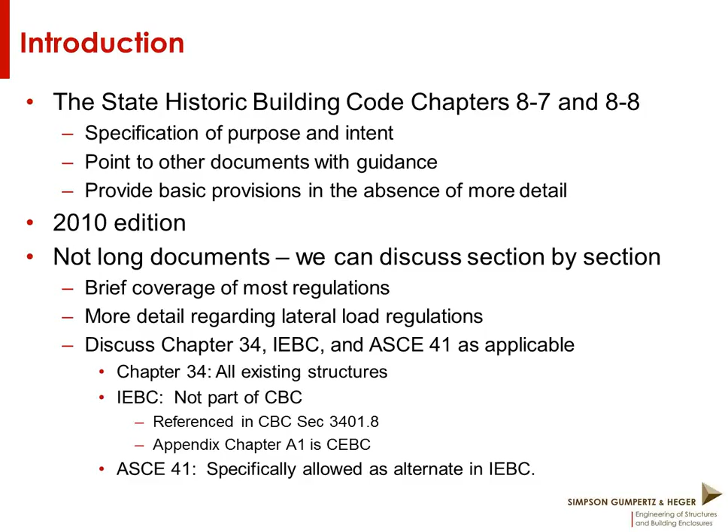So here's an outline of what we're going to be discussing following the introduction here. We'll go through Chapter 8-7, which is the structural regulations. Again, talking about the purpose and the intent, talking about structural survey, which is essentially an existing condition survey. Talk a little bit about non-historical additions and alterations, structural regulations, which are essentially everything but seismic, and the lateral load, which is really just the seismic part.

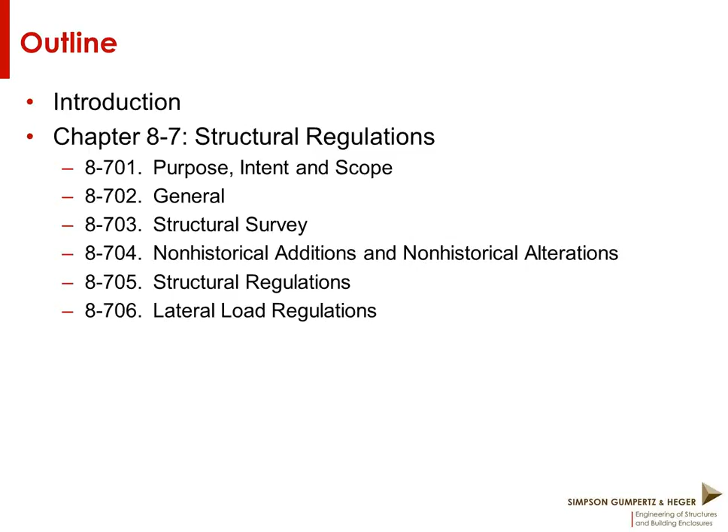Following that, we'll talk about Chapter 8-8, which is the archaic materials portion. Again, this discusses what its purpose and scope is. It talks about what types of materials are around in archaic structures, what those materials might be. Specific conditions are provided for individual materials: masonry, wood, adobe, concrete, etc. We'll talk about those each in turn. I'll also talk about the table at the end of that chapter, which gives strength values for existing materials, and then finish with a brief summary.

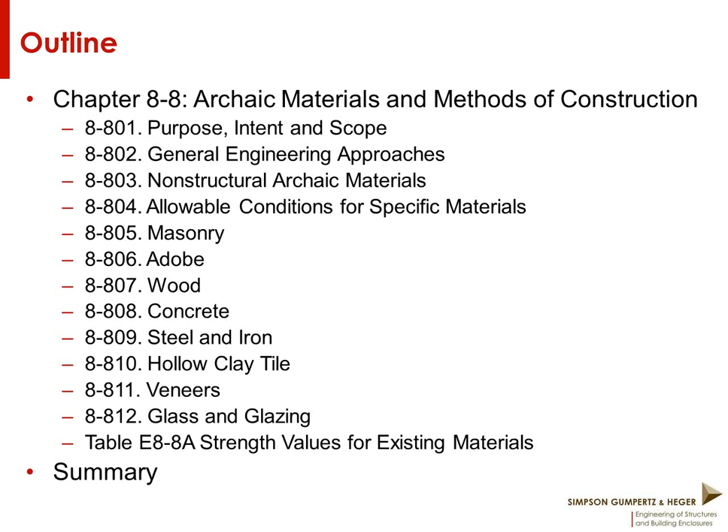Structural regulations. The purpose of these structural regulations is to provide an alternative to be used for historic buildings. The code references specifically qualified historic buildings and indicates that you can't just use this if you think it's appropriate. You need to get approval from the enforcing agency.

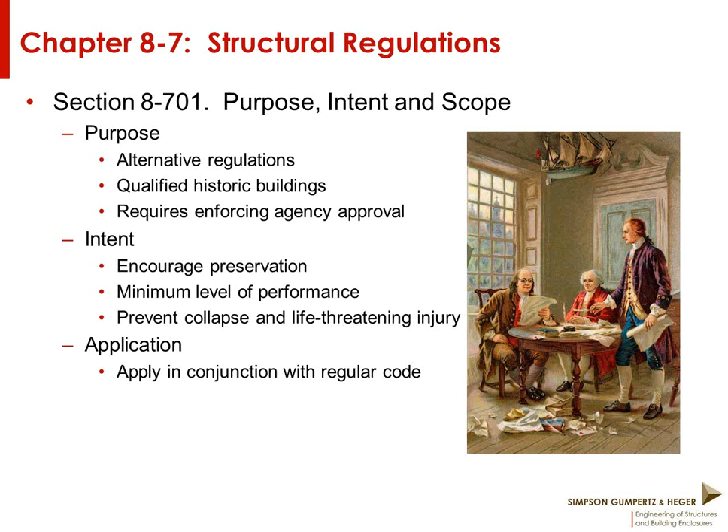The idea behind everything, of course, is to encourage preservation, to provide a minimum level of performance that's appropriate, and to prevent collapse and life-threatening injury. That's the same performance goal that exists in the main building code for regular structures. The idea, because this code is only a few pages long, is to be applied in conjunction with the regular code as well as in conjunction with other documents.

In general, the idea here is that we want to provide a level of safety, and that level of safety for critical facilities should not be reduced. In other words, if you have something like a hospital or a police station that's also a historic structure, you're really not intended to be using reduced values for those elements. You really should be using the provisions of the regular building code.

That said, it also specifically says that you can do a voluntary upgrade, particularly for seismic purposes, without any regard to specific provisions.

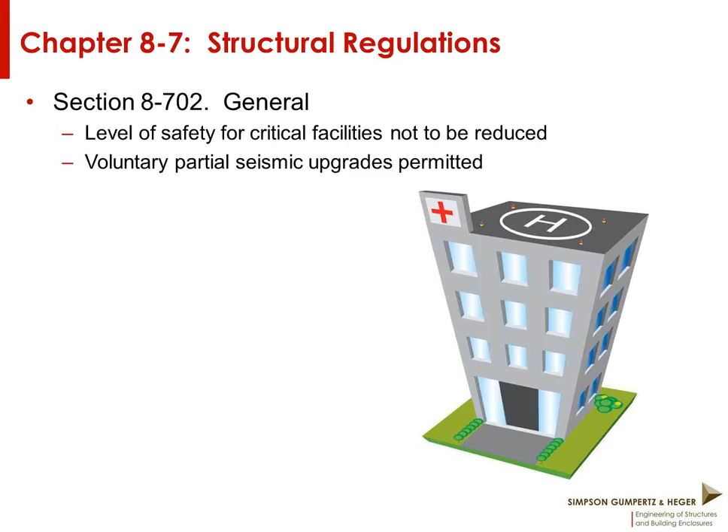Structural survey is what they call essentially both reviewing drawings and also reviewing the conditions in the field. With any existing building, and particularly with a historic building, the survey is critically important in order to understand what you actually have. You may have a great set of documents, and you may have had some changes that have occurred to the building over time, or the documents themselves may not be very good, and you may have to spend quite a bit of time in the field to document yourself what's actually there.

There's a particular requirement with regard to anchorage of veneers. The CHBC in the structural sections really spends quite a bit of time on veneers relative to other things because they are so critical in terms of safety, not only for occupants, but for those outside the building. If you're going to be adding or altering non-historical portions of the building that are structurally separate, then you would just be using the regular building code there.

The existing structure is not permitted to support additions unless the existing structure is strengthened. This is actually a little bit more restrictive than Chapter 34 and the IEBC, which both give a little bit of leeway, 5% additional for gravity and 10% for lateral load. But since the State Historic Building Code is an alternate provision, you're always permitted to use those normal code provisions, which would allow you those small increases even for historic buildings.

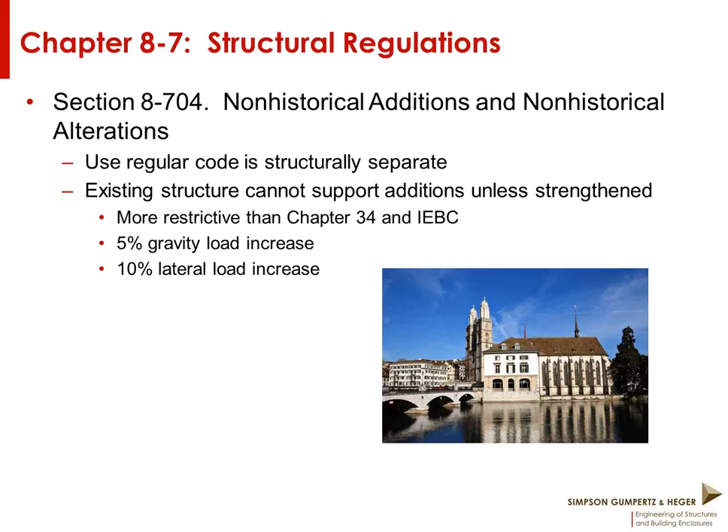The structural regulations here are essentially everything but lateral load. Everything but seismic. There is a specific provision that says with regard to gravity loads, you're allowed to consider that the structure is acceptable if you don't see any distress and you do see a complete load path. That is, the fact that the building has been around for a number of years and has been successfully resisting gravity loads for all that time. If there's no change in the loads, then it's permitted to consider that that's acceptable.

You do have to evaluate for wind and seismic, as indicated in the subsequent sections. Wind loads are allowed to be reduced. You only have to use 3/4 of that specified in the regular code. But you do have to correct something if you see that it's unsafe.

There's an interesting provision here that says if you are able to improve the performance, that is to reduce damage, particularly with regard to wind and seismic loads, without impacting the historic fabric, then you're recommended to do that. Of course, it's not much of a code provision, but it is a suggestion that wherever possible, you should improve the performance because that will aid in the preservation of the structure.

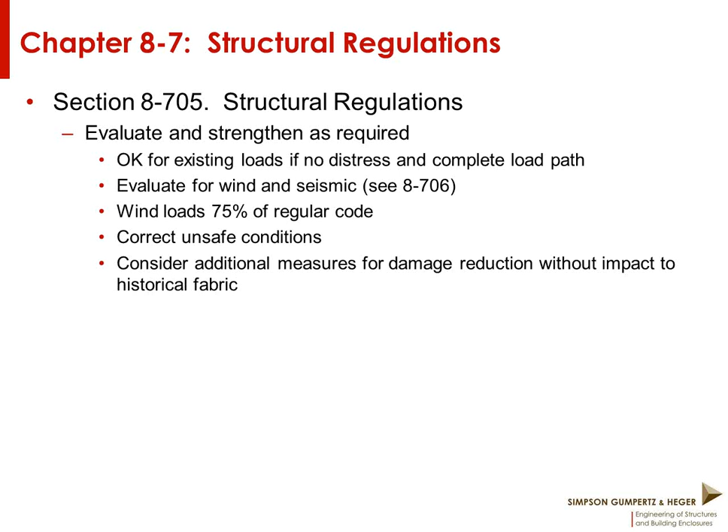The lateral load regulations are essentially the seismic regulations. We'll spend quite a bit of time on this relative to some of the other provisions. First of all, the CHBC says you're allowed to use the R factors, that is the response modification factors that are applicable in the regular code. The thing is that they're not usually applicable because they all come with special detailing requirements attached, and it's very rare that in a historic structure you're actually going to see things that comply with those detailing requirements.

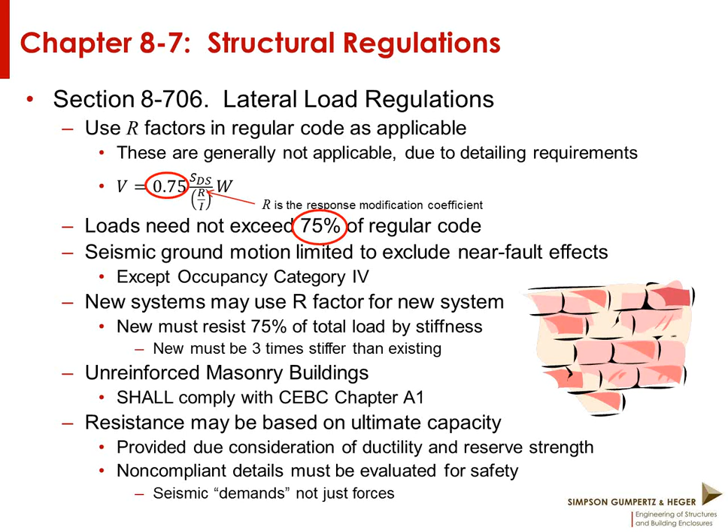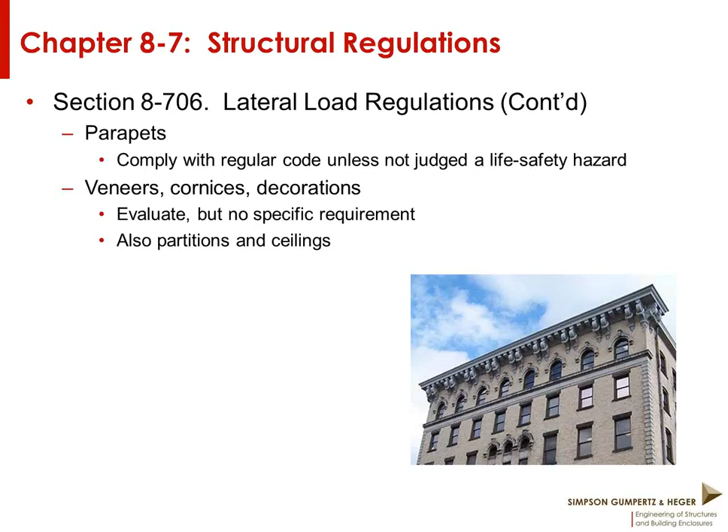Parapets are addressed specifically because they are potentially quite a hazard for passersby, and you jump out of the CHBC and just comply with the regular code with regard to parapets. Veneers you're required to evaluate, but there is not a specific requirement except what exists in the regular code. Similarly for partitions and for ceilings. Alternative provisions for lateral loading exist in Chapter 34, where there are requirements for modifications which are permitted within listed thresholds.

IEBC, as I've discussed before, is a great resource. Depending on the level of work, there may be a full or partial upgrade necessary using the IEBC. The full upgrade that they discuss is essentially equivalent to the regular code. The partial upgrade is 3/4 of the design forces. This is the same as the CHBC, so it really is pointing you in the same direction.

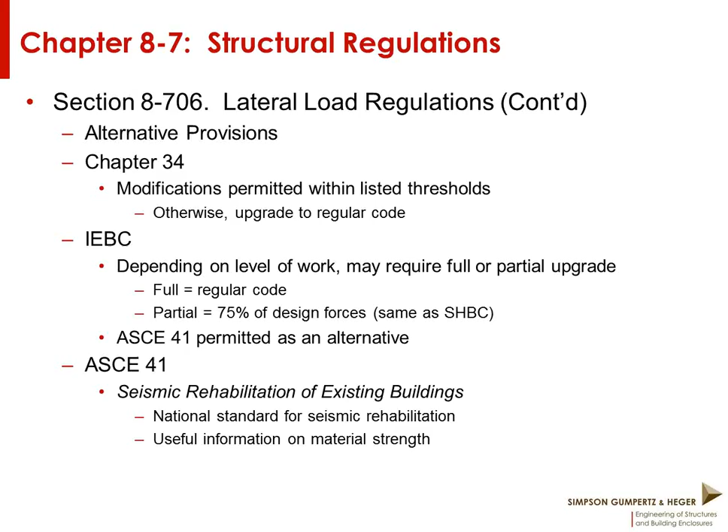ASCE 41, this national standard document, is permitted explicitly as an alternative way of complying with the IEBC. This document, called Seismic Rehabilitation of Existing Buildings, is a national standard. It's been around for quite a few years now, and a new version in 2013 is just about to come out. It has a lot of great material on strengths, far in excess of what you're going to find in the chapter 8-8 that we'll talk about in a little bit.

It's really the best and most appropriate approach for seismic analysis and upgrade of any existing building, particularly a historic building. The reason is because this is a displacement-based approach rather than a force-based approach, and it encourages nonlinear analysis. This, of course, is going to take more effort in the analysis and often requires a peer review, but it really allows the specific consideration of actually how these archaic materials behave, and provides a lot of guidelines as to the appropriate levels of deformation that are acceptable.

These guidelines are based on state-of-the-art research, which is continuing, and we do have a lot of great information about archaic materials, as well as not quite so archaic but still older materials. This allows the best consideration of the capabilities of the existing building. As a result, it's more historically sensitive and results in lower construction costs, if higher engineering costs.

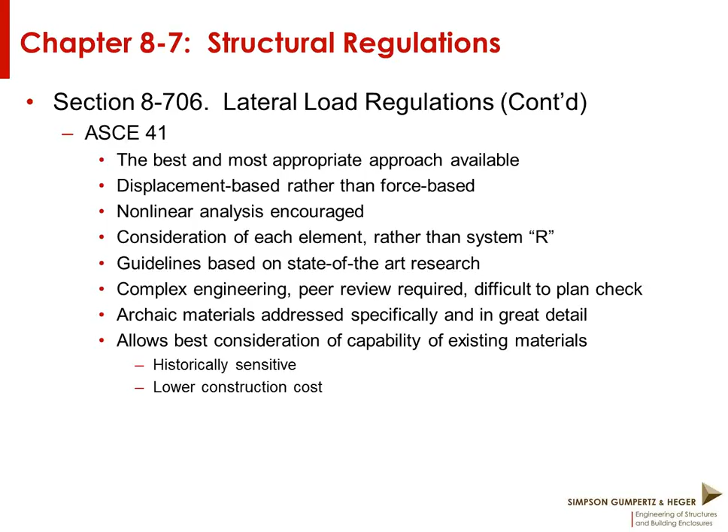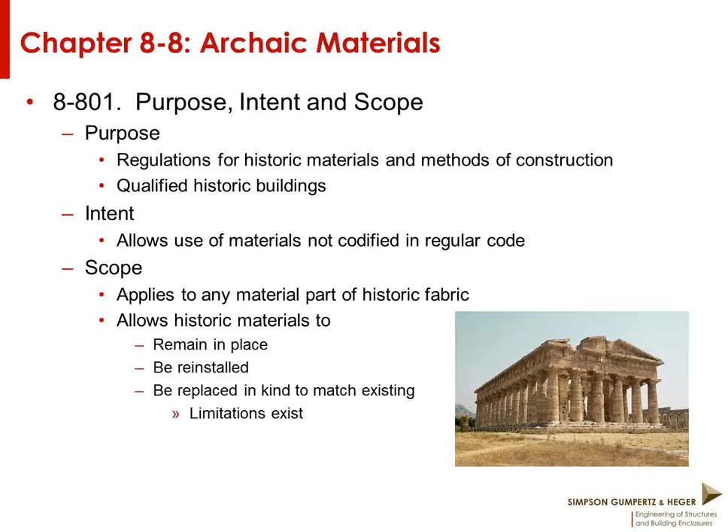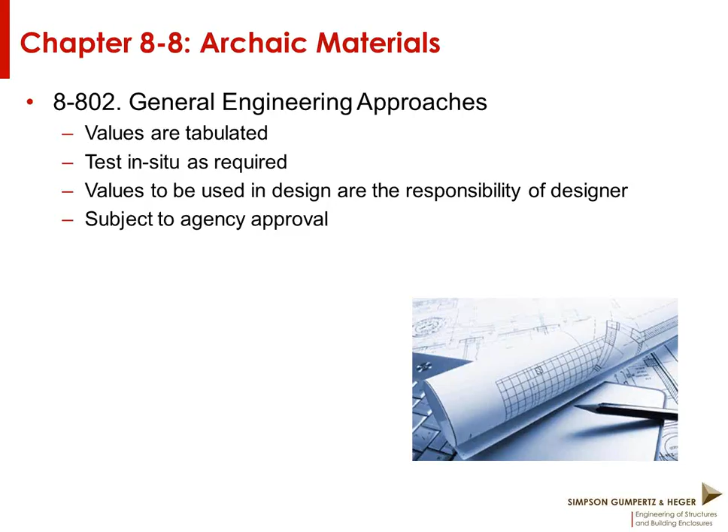The general approach is that they have tabulated values, but it is recommended to test materials wherever possible. The bottom line here is that there are values in the table. They recommend that you do testing, but the values that you actually use in the design are really the responsibility of the designer and subject to approval by the enforcing agency.

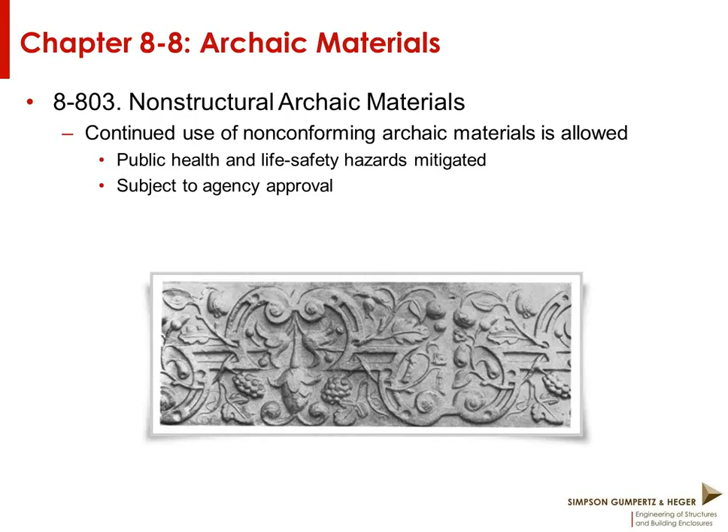You're allowed to continue to use non-conforming archaic materials, provided that there is no public health or life safety hazard, and of course where the agency approves.

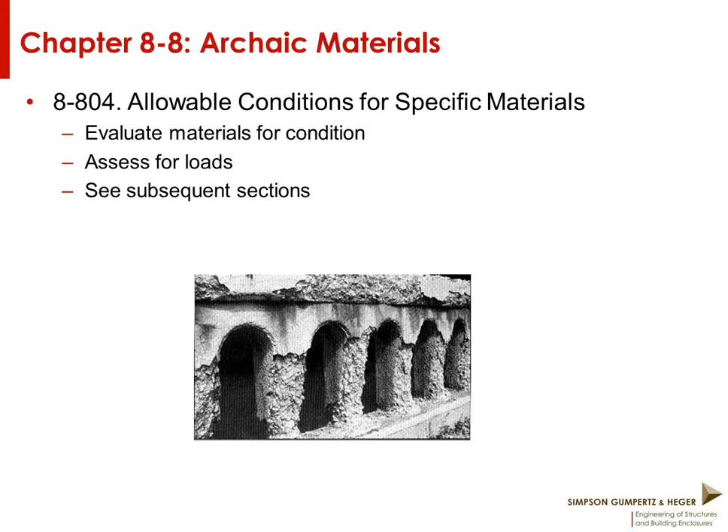In masonry, which applies to both reinforced and unreinforced masonry, you're permitted specifically to use a shear value of 9 pounds per square inch without doing any testing. This is a value that's a fair amount lower than in the CHBC Appendix Chapter A1. But it is recommended that you do testing nonetheless.

It specifically indicates that if you have stone with brick backing, you can treat it as solid brick within certain limitations. The code also allows you to repair or infill existing walls as they are currently built, but where walls are completely reconstructed, they must conform to the current code. This harkens back to the requirement previously that you are allowed to use archaic materials, but it does say here that if you are reconstructing a wall completely, then it must conform to the regular code.

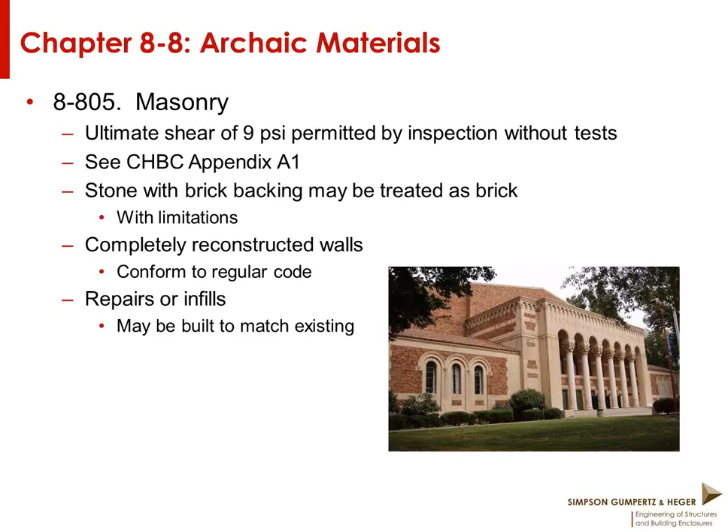Adobe is addressed in this chapter and really not anywhere else. That is unburned clay masonry. Although there's not a whole lot of information about adobe, this is really the best information about adobe that exists anywhere. They make specific point about deterioration. Clearly, in adobe, both the material itself as well as the mortar are quite susceptible to deterioration due to water infiltration in particular.

There are height to thickness ratios for walls that are specified. For single story or bottom story walls, a ratio of 6, and for upper stories, a ratio of 5. These are some pretty stout walls, but that is typically what you see in adobe structures.

There are specific requirements then for bond beams at floor and roof levels, that is reinforced masonry elements at the floor and roof levels. Interestingly, they indicate an ultimate shear of 12 psi permitted in adobe, which is actually larger than the value that they permit for regular unreinforced masonry. Not quite sure why that's the case.

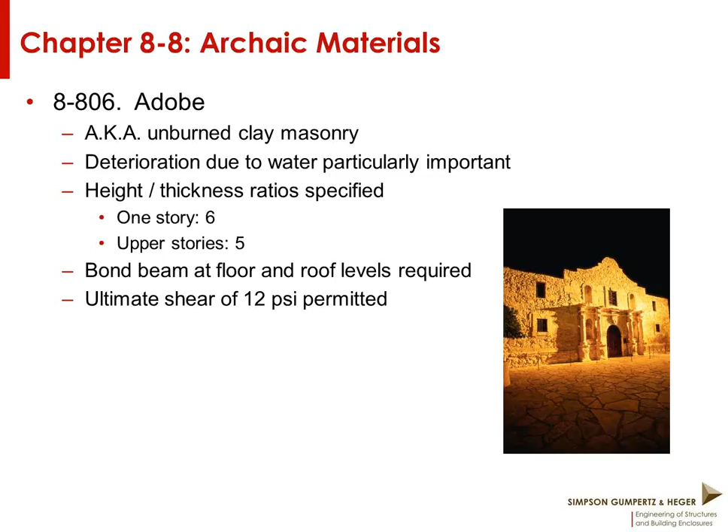There are quite a bit of strength values provided in the tables for wood. They do recommend that you investigate fastener details and spacing before using those tables. There are allowable stresses, and you're permitted to use the values consistent with the codes applicable at the time of construction. This is important because the wood was better when many of these older buildings were built.

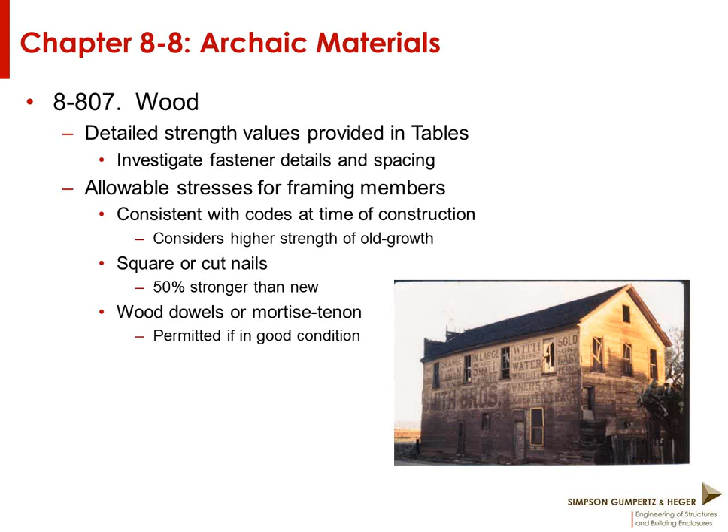The older codes actually allow you to use higher stresses than exist for current wood. Square nails or cut nails are stronger than new nails, and you're allowed to use more load in them. Wood dowels and mortise and tenon, which are almost never used anymore but do exist in some historic buildings, are permitted to be used provided that they remain in good condition.

Existing concrete may remain in place regardless of reinforcing or detailing. It's certainly reasonable — if you're going to permit unreinforced masonry, you ought to be able to have unreinforced concrete; it's certainly better. That said, details must be evaluated for strength and behavior.

Even if you're using the State Historic Building Code and not using ASCE 41, ASCE 41 Chapter 6 is still a great resource for strength data. Concrete strength is listed by time, that is time built, and also where it exists in the building — for example, time frame 1900 to 1919, 1920 to 49, etc., for all these various things: footings, beams, slabs. This is so much more detail than you'll see anywhere else, and ASCE 41 Chapter 6 has this.

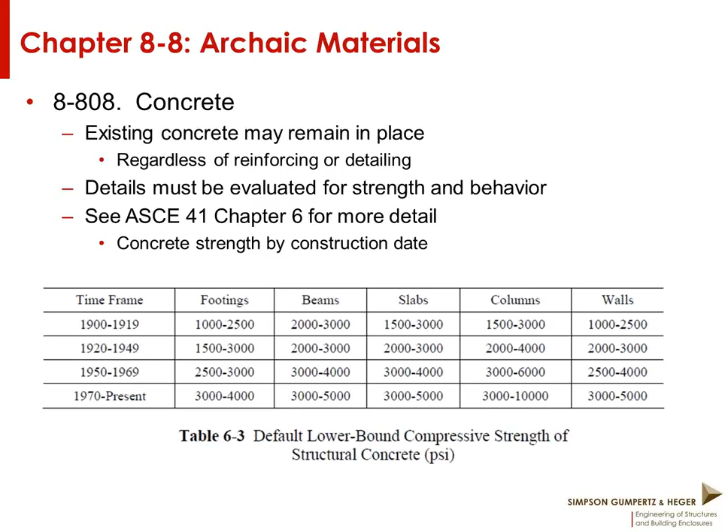There's also information in ASCE 41 Chapter 6 discussing reinforcing steel — again, quite a bit of detail based on year constructed and what grades were available at that time.

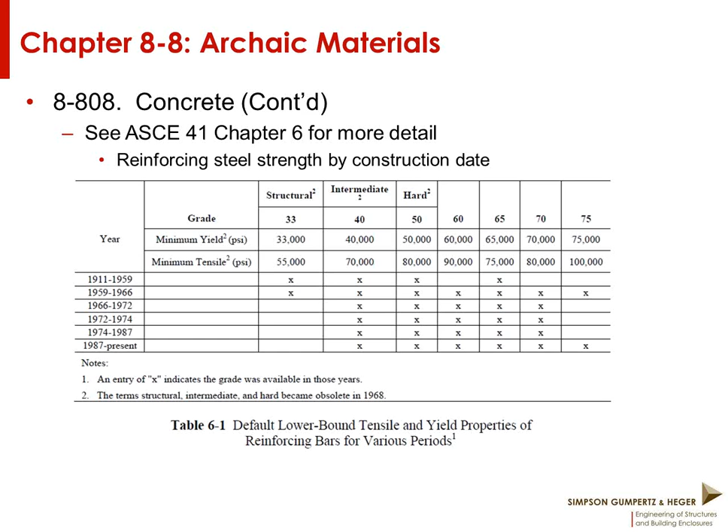Steel and iron, not reinforcing steel, but structural steel. Most of this chapter, 8-809, really concerns itself with wrought iron and cast iron as opposed to structural steel. They essentially say you can leave it in place and continue it, but you do need to look at the uplift capacity. There's very commonly the case that column bases for wrought iron or cast iron are not nearly as well addressed as those in structural steel, and they make a particular point of that.

They say to assign working stress based on the time of construction, and again you can look at ASCE 41, this time in Chapter 5, for more information. Even if you're not using ASCE 41 for your analysis, please look at these tables because they give you a lot of great information with regard to the tensile strength and the yield strength that was available during different periods.

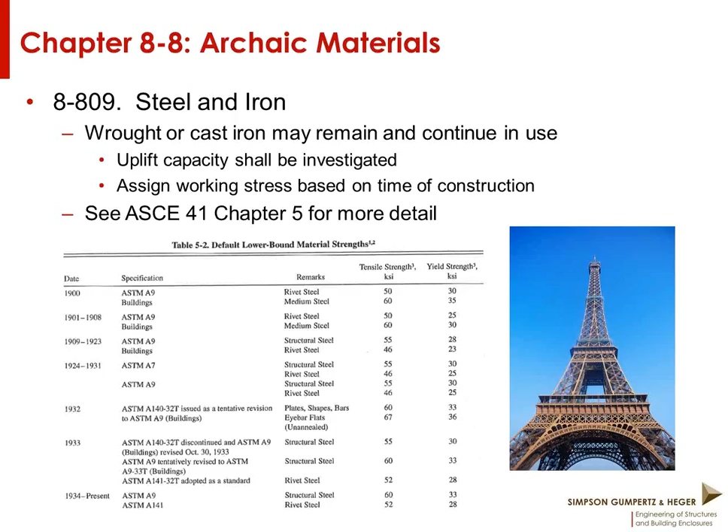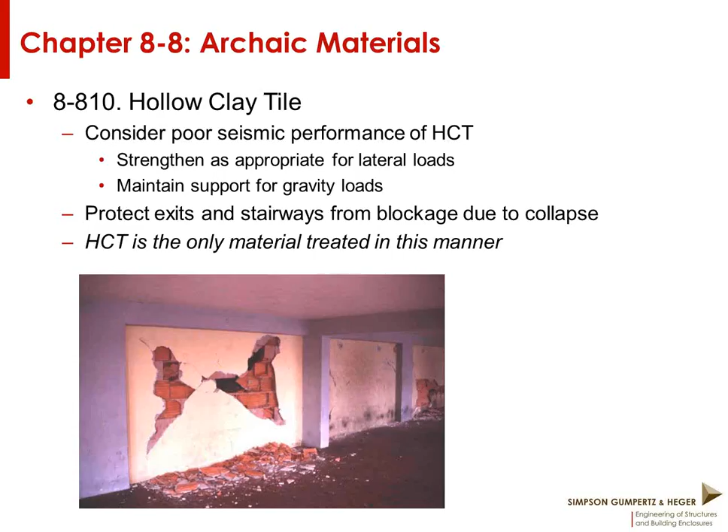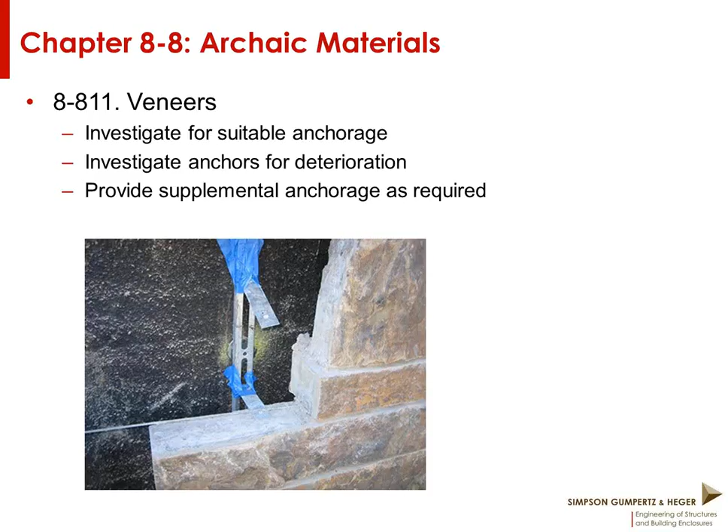Veneers are very common in historic buildings. It's recommended in Chapter 8-8 to investigate that the anchorage is suitable and that the anchors have not deteriorated. It's required to provide supplemental anchorage as required, either due to inadequate anchorage or due to deteriorated anchorage.

Glass and glazing — this section is really not about glass in general, but about glass subject to human impact, where you would normally be required to use tempered glass. There are some provisions here that allow you to leave historic glass panels in place, either by providing additional backup panels, protective film, or some sort of guard systems that will protect against human impact.

Strength values are listed in the back of Chapter 8. Table E8-8A provides strength values for existing materials. It's essentially a copy of the table that's in the CEBC table A1D. It addresses horizontal wood diaphragms of various types — straight sheathing, diagonal sheathing, both for roofs and floors, and roofs with roofing on or not. It addresses cross walls, which are a specific element that pertain to the analysis methods recommended in CEBC A1 with regard to unreinforced masonry buildings.

There are discussions about existing footings and about Douglas fir wood. Reinforcing steel and structural steel, they just give you one number each, essentially. Compare that to what was provided in ASCE 41 in those tables that go on and on for different years — I only reproduced about half of the information that was available in that document. You compare that to these single values in Chapter 8-8; it looks kind of pathetic.

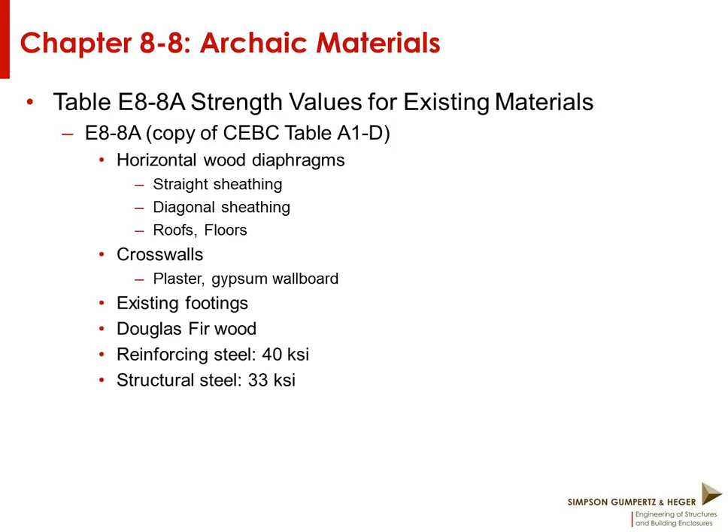There's another table, table E8-8B, which is strength values for new materials used in concert with existing materials. Again, this is a copy of a table from the CEBC. This one, table A1-E, provides values for horizontal wood diaphragms with plywood overlays, that is where you're strengthening an existing diaphragm with new material, also for new shear walls and cross walls. Tension bolts and shear bolts are again elements that are really applicable to the anchorage of unreinforced masonry buildings, the walls to the roof and floor diaphragms.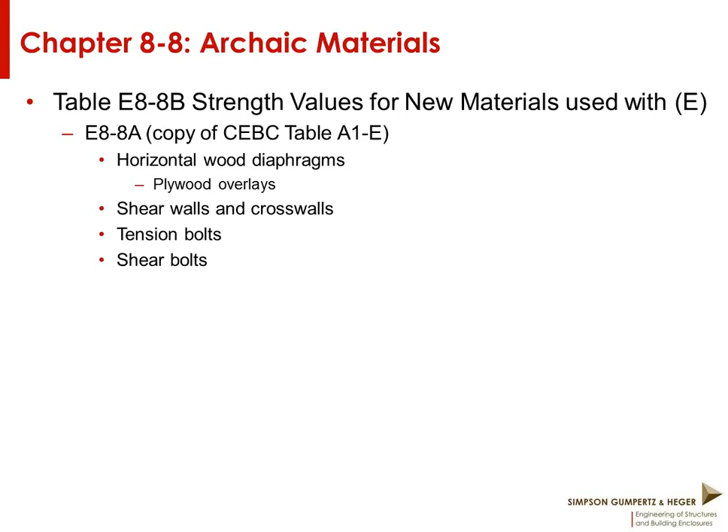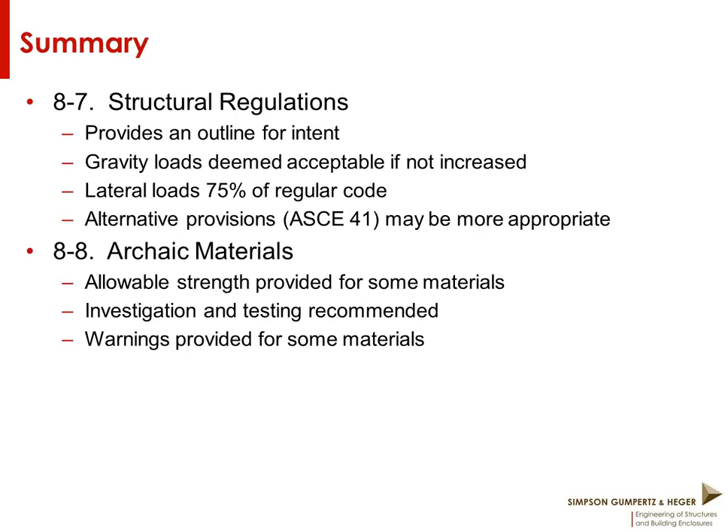So in summary, the structural regulations provide an outline for the intent of protecting buildings. Gravity loads are deemed acceptable as long as they're not increasing and things have remained in good condition. Lateral loads, both for wind and seismic, are 3/4 of that in the current code. Alternative provisions using ASCE 41 may be more appropriate. Archaic materials' allowable strength is provided for some materials, again not nearly as specific as those in ASCE 41. It's highly recommended to do investigation and testing, and there are some warnings for materials such as hollow clay tile.

And that is our presentation. We will be pleased to discuss or answer any comments or questions. So at this time, if you have any questions, please type them into the box, and we will ask Stephen those questions for you.

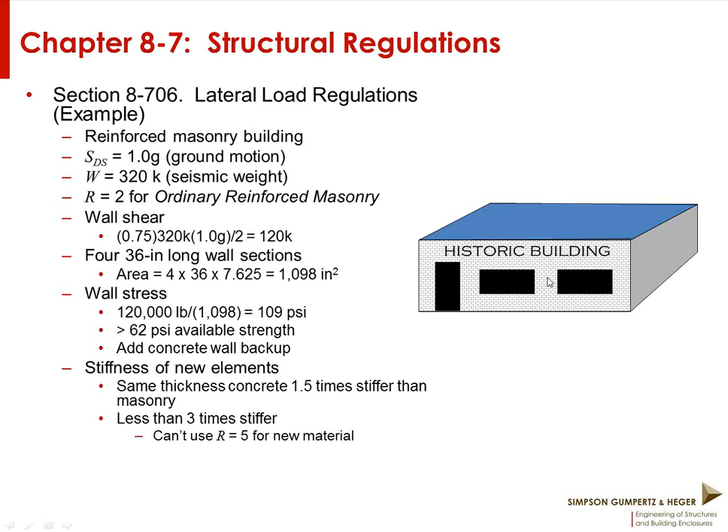I'll get the ball rolling, I think. I had a question regarding the windows and the glass. Thinking back to the days when I was in planning and working with our building department, a lot of times we had questions, especially in bathrooms with the existing windows, about what is appropriate for those windows when we're doing renovation in the bathroom. So the question is, if it's an existing window, can you use the film or another panel? That is specifically allowed - you can use any of those three approaches: either an additional panel, for example a clear panel behind a stained glass panel, or a protective plastic film, or some sort of guard that prevents human impact.

And if you were to replace in kind, same size, shape, everything, within the existing window opening, that window would not be allowed to use that protective measure? No, I think there is a general provision that allows you to replace materials in kind, and as long as that's considered historically appropriate, then I think you would be permitted to take the same approach, whether it's a replaced or an existing material.

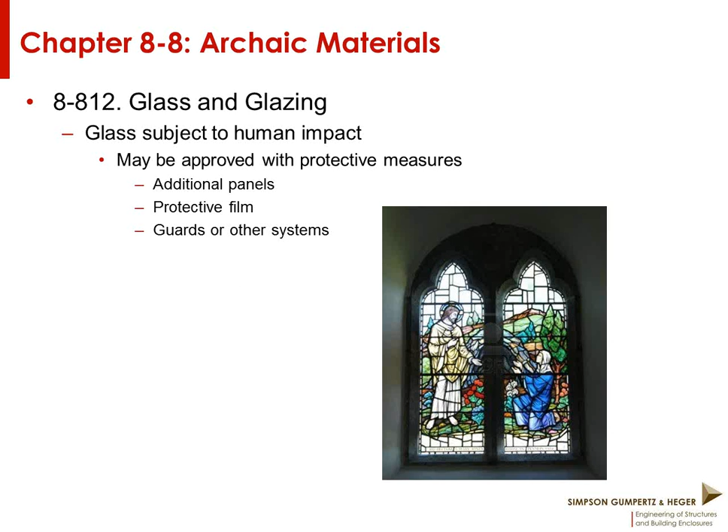Another question: have you had trouble in San Francisco with building officials accepting the ASCE calculations? No, it's quite commonly done. They will generally require a structural design review, also known as a peer review, when you want to use that approach. We are currently working on the Veterans Building downtown San Francisco, which is on our cover slide here. We are using ASCE 41 for that, and we have a structural design review, and it will be permitted through San Francisco DBI. I've also served on the structural design review committee for a number of other buildings that have used ASCE 41, and generally DBI will insist upon that review when you want to take that alternative approach.

The next question in response to that is, do they hire another engineering firm to do that peer review? The project sponsor hires the firm.

Another question: can you discuss the structural values of lath and plaster? Well, interesting - there are some values available in a newly published document by FEMA, I think, if I recall. It's called FEMA P807, and that document was recently produced essentially for the city of San Francisco in their assessment of what to do about soft story apartment buildings. Therein, the softness of the bottom story is really a function of the fact that there are so many lath and plaster partitions in the upper stories that they create a lot of additional strength and stiffness in the upper stories. So that document provides great information on the existing strength and stiffness of those partitions. I should say it can really only be used for that purpose, that is, where that strength and stiffness is not necessarily your friend but your enemy.